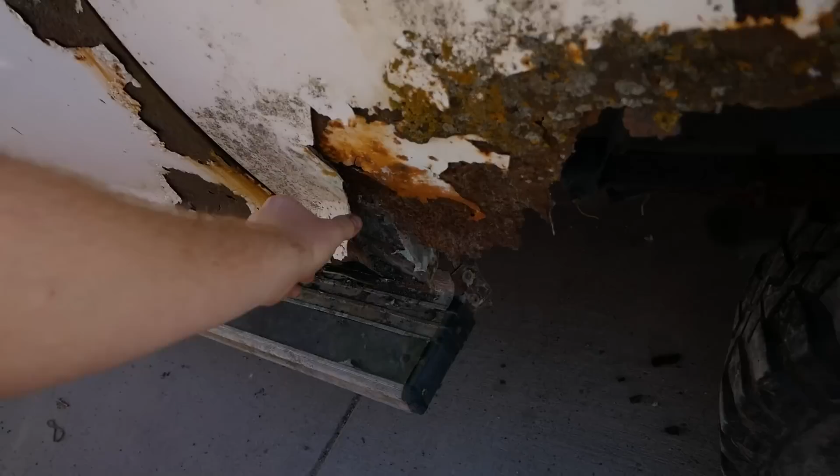So like I mentioned, there's a few things I have to get done right off the bat, and everything beyond there is kind of like, I'll get to it. Number one, safety. I don't want to die in a rusty piece of shit Bronco. If you didn't see episode 1, this thing is absolutely a piece of crap. It's had like 3 layers of repair already on top of it, and it's rusted out since then. That side was replaced. If you come here to the frame, you can just grab the cab mounts, and that's what's left of the frame. Pretty typical Iowa rust mobile.

So yeah, not exactly the essence of safety here. So what we're gonna do is build a roll cage right above here to both keep the frame in one piece and keep me from dying if I roll over. This means I have to do some fabrication, which is honestly my weakest strength when it comes to working on cars, fabricating and welding and all that stuff. I usually just weld a stick to a nut and it's like, yeah, there, it works. So we're gonna do everything right this time, and in order to do that, you have to have the right equipment.

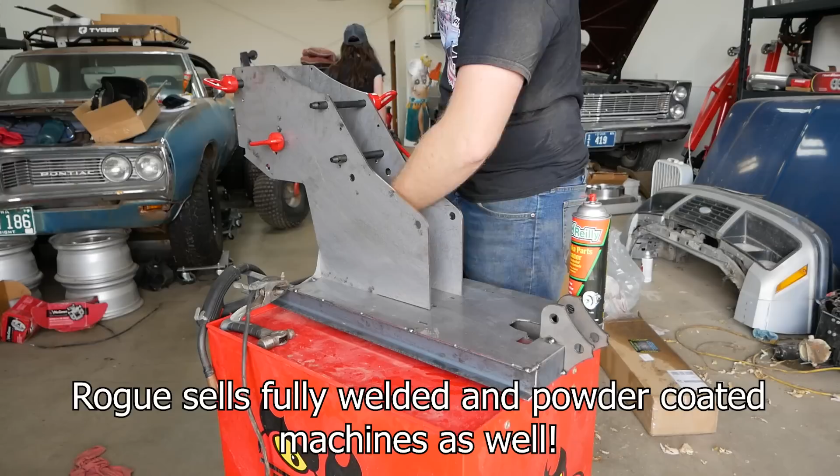Never been a great welder.

Oh wow, yeah, those are pretty bad. Don't zoom in on them. I'm gonna zoom in on them. No one needs to see this. No.

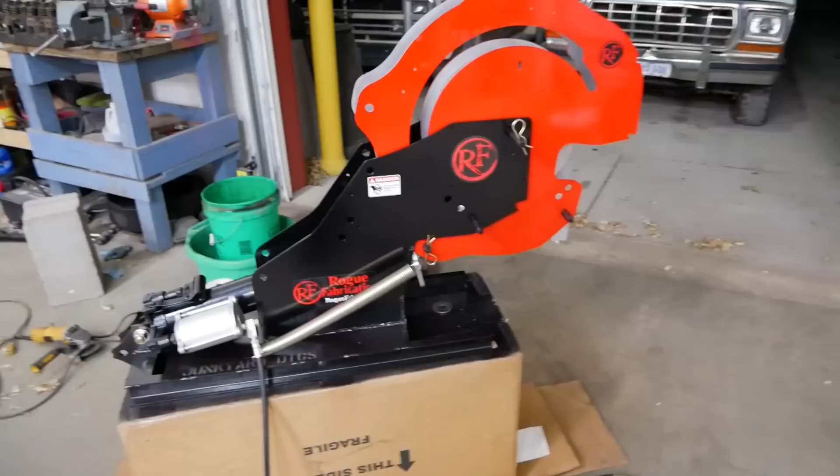Well, it's totally dark now, but our Rogue Fabrication tube bender is finally done. Not to toot my own horn, but I think that looks pretty damn sick with the red, silver on the inside, and black for the frame. And I finally got to use those stencils I made in the Army. There were a couple Junkyard Digs hidden in there.

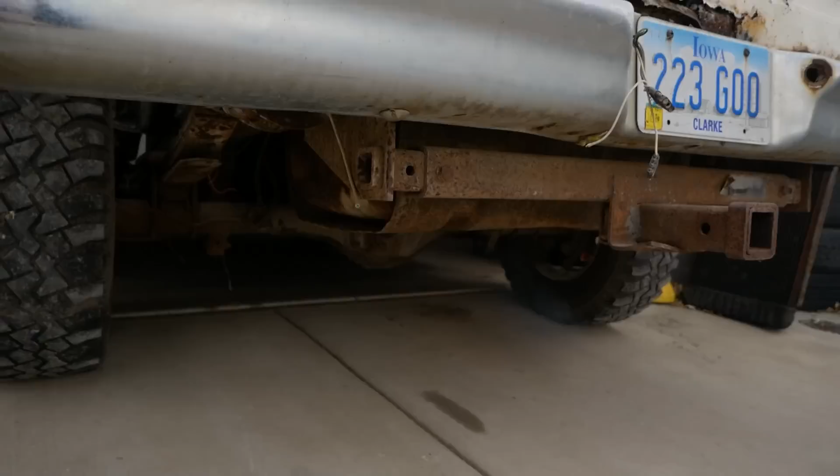The fact this thing runs and drives is honestly very impressive. Remember, this thing is such a piece of shit that it's literally scrap. So we're doing it more justice than it will ever get by giving it one last little ripperoonie on the internet.

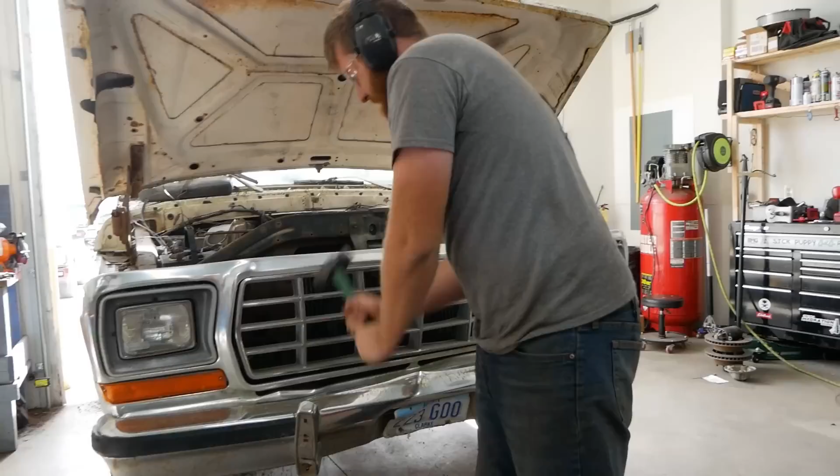Start working our way back. Sway bar, running boards. Cut some of that extra floor shit out. We don't need that. We don't have a floor to cut out. That's true. Cut it out with compressed air. Not like the cutting tool, just the blowgun.

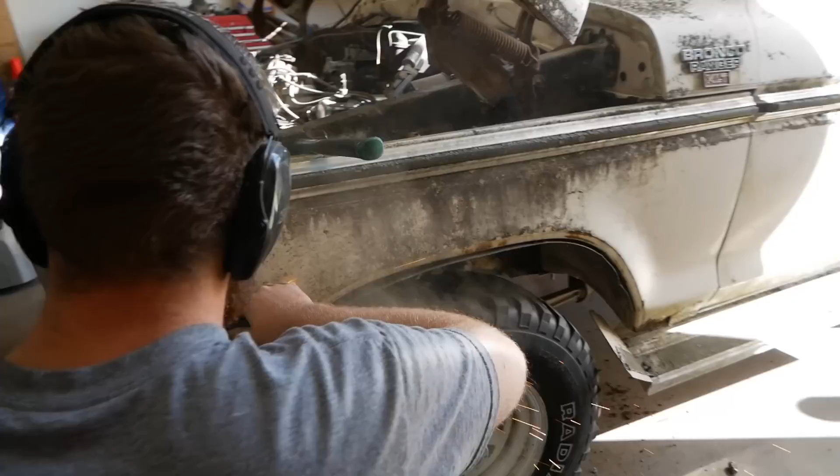Love it. Now this is for style. We're not just Neanderthals.

Looks amazing. Hell yeah, it does.

Forgot a spot. That's attached to the thing that holds the grill on. Nothing a zip tie can't fix.

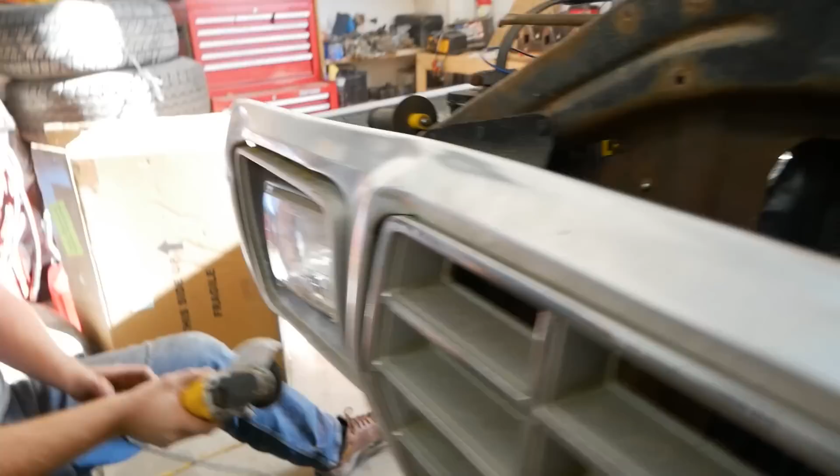How does it look? Like a trophy truck. It really does, actually. Our approach angle is ridiculously good now. We're just going to keep at this for a bit until the other side looks the same, and then we'll be back.

It looks like a Torino. It kind of does, I'm getting Torino vibes, not gonna lie. It looks a lot cooler than I was anticipating. I was a little nervous, but now I'm glad we went this route. This will allow us to open up the inner fender wells, get a lot more air to that engine, so when we're idling off-road for 7 hours, we don't cook the thing.

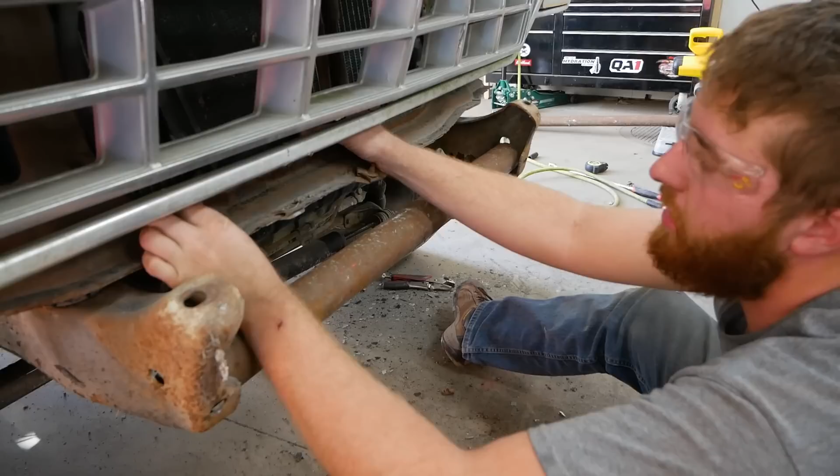Transmission cooler. Okay, listen, we gotta talk. You need to go over here, man. Stay.

That should be more than enough for a tow point. Alright, steering stabilizer's in the way. Someone already welded this bracket up here. I'll see if I can get him off.

It's already blown, there's oil everywhere. It's junk, we don't need it. Way it goes, death wheel. Alright, that sucker's out of there.

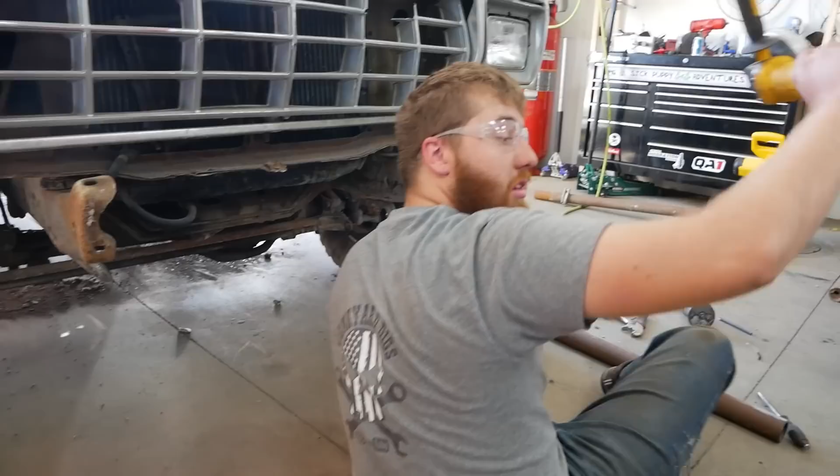Okay, next up is our sway bar. We're going to get that guy out of there so we get some good side-to-side articulation. This looks to be a really beefy sway bar, and I actually kind of want to keep him around, so I'm going to put the death wheel aside. Don't worry, I'll be back. Then we're going to take the bolts off and remove it properly.

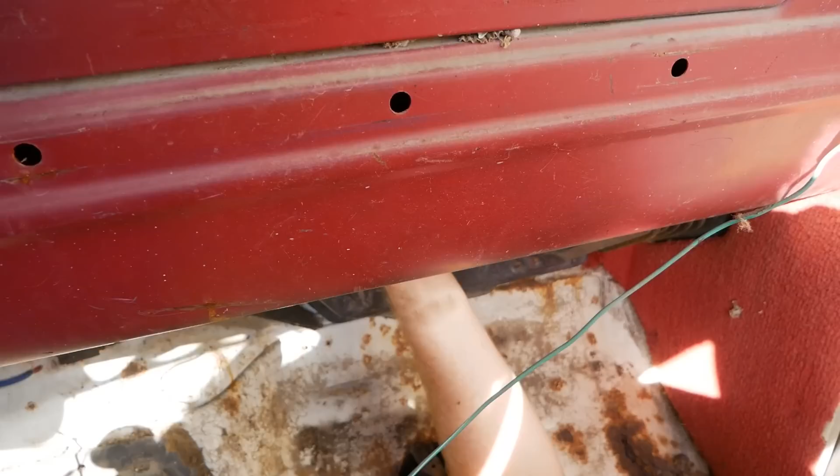Sway bar is off. Wow, one really big convenience of having a super rusty floor - if I wanted to, I could do all the other dash wiring from right here. It'd be no problem. Let's just work on the heater box. Oh yeah, there's some wires. Some more wires. Good to go.

Well, we've got all this stuff taken off now, definitely have a much better approach angle. I say we go give her a test real quick, see if it does any better. We've got, I won't say a course, but there's a pile of dirt over there that we drove up before, and it made it, could have been a little better. We'll see how it does now.

Oh my God. Okay, here we go. Okay, what else you got? Come on, we need a little flex. There it is. We let the body roll now that the stability bar is gone, it's not pulling it around. This hinge is at a different angle.

Oh, it twisted so much. Oh my God. Alright, I'd say we're making progress in the right direction. Let's go get some lunch, come back, and finish up the running boards in the back half. That's good stuff.

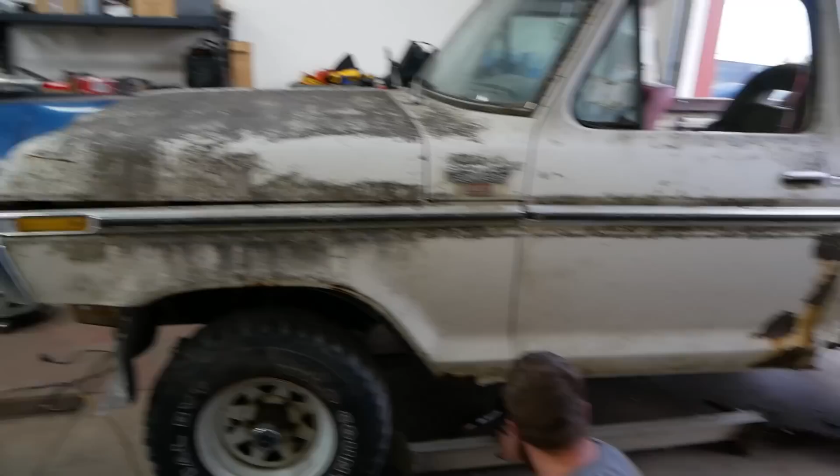There we go, does that look a lot better? That does look a lot better. You're right, Kevin, good job. Okay, same on that side.

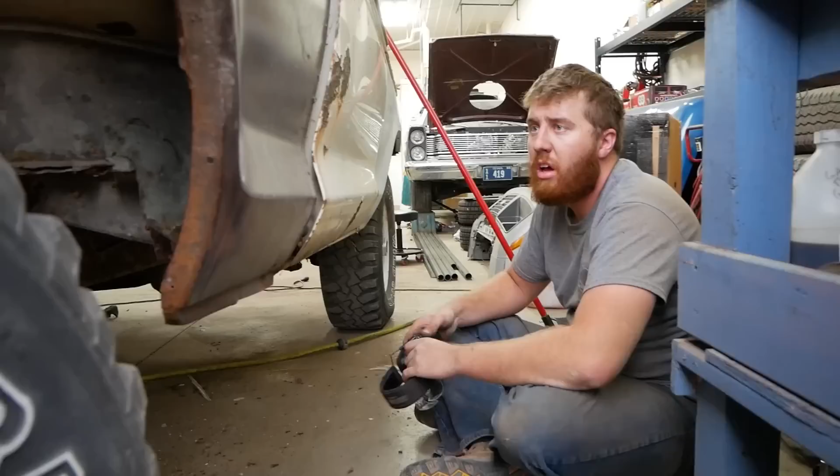Those were the worst thing I've had to take off so far. Okay, everything's done up front and on the sides. Let's move on to the ass end.

There we go, bumper's still good, so we're actually going to save this guy. It snowed last night, it's a solid 34 degrees outside. Winter's here, my favorite.

Seeing that it's going to be like 46 degrees the day of the event, I might want to put these doors back on when we get a little closer to it, but for now, I'm definitely taking them off so that we can get a little more room in here to work.

Oh shit, I forgot about the wiring. Why are there even wires? Is there a speaker? Oh, Jesse! Hello! Can you grab a wire cutter?

Oh, convenient timing for you to arrive for the day. Yep. Oh, thank you, sir. You saved me. You're welcome. Yes, it's possible to take this off with one person if you're smarter than me and you remember the wires. Would you like a door? I'm good, I have some actually.

Dang hole. Alright, so it's time to do the roll cage. We've gone ahead and stared at the frame and some other bits for 40 minutes, so by now the required time of thinking about stuff should be up, and it should come to me as we go.

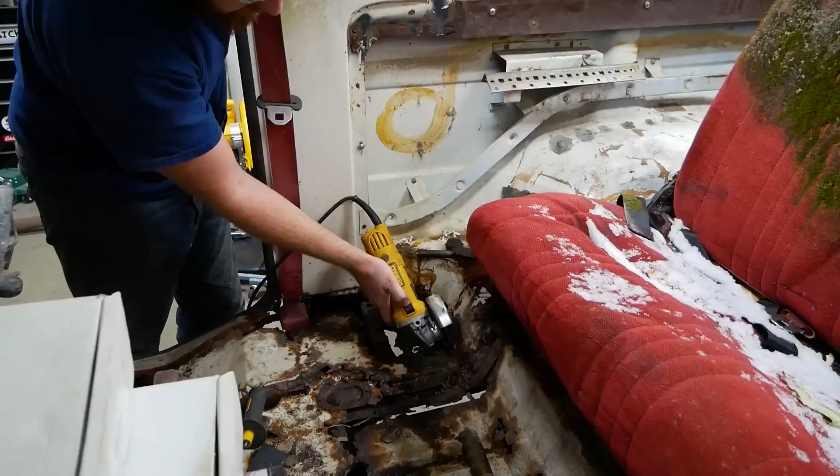Tired of getting dirt in my mouth, so I actually wore a mask. That's all tacked up. I'm going to finish this off, and then we'll be back to see the end result of our bracketry for one side. It only took an hour.

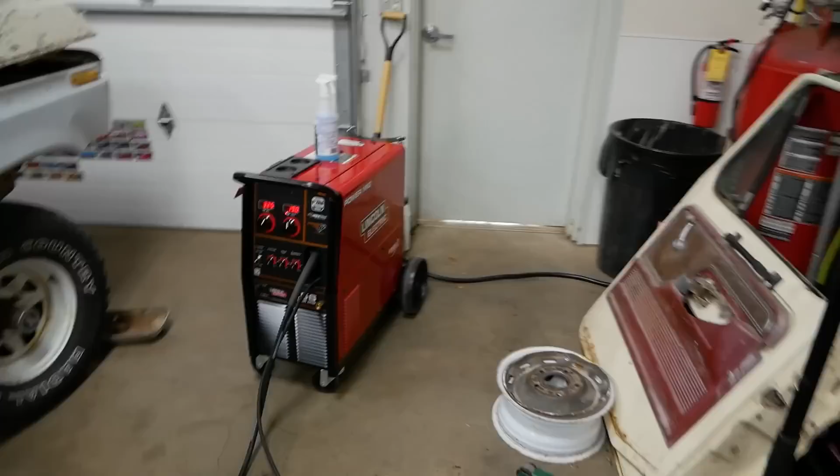I have spent my entire life with worn out, used, poop welders. I've never been able to make a good weld until now because of that right there. That is a brand new Lincoln Electric 256 MIG welder. I was tired of losing time screwing around with all this other stuff and making booger poop welds, so I went down to the welding shop and bought myself a brand new $3,000 welder out of my own pocket.

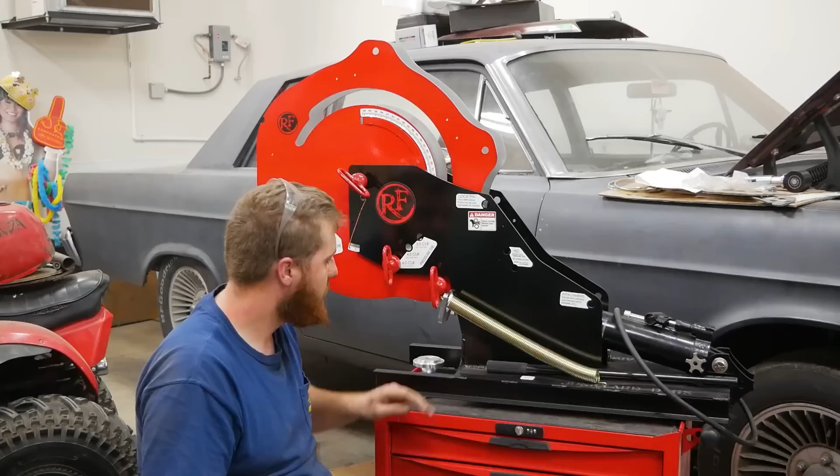That's more like it. So it's come to the point in the video where we're gonna wipe all the dust off of our brand new, freshly painted and assembled Rogue tube bender and figure out how the hell to use this thing. Now usually, when it comes to fabrication channels showcasing one of these, they know what they're doing and they're using big words and talking like blah blah blah, numbers, letters, numbers, and I'm like, what's happening? That looks cool, you can do some cool stuff with it, but I don't know what you're saying that tells me this product has an advantage over other products.

So we're gonna do something no one does. We're all gonna learn how to use this thing together, because I have no idea. There's some numbers and a stick and some offset things and some CLRs and a bunch of holes and pins, and I'm gonna hurt myself on this, all right?

First thing I'm gonna do is spend about a half hour on Google. I'm gonna go through the entire instruction manual, go through all the videos on Rogue's website, look up the fabrication series. That guy's got a lot of great stuff about tube bending. Learn a bunch and then come back and I'm gonna show you what I learned and see if I can figure out what all this stuff means, and we'll all go through this as a team.

Yay, friendship. You don't have friends.

Okay, that's a shape. We've drawn a shape. We've made progress. We watched some videos. We went through some of Rogue's videos. Honestly, Joe, if you're watching this, you're way too smart. Okay, I don't know what the hell you're saying half the time. I watched him like 4 times and he's just like, boopity boopity boop, I built a cage. Where'd the numbers come from? What do I do with my hands? Anyway, we've made this shape.

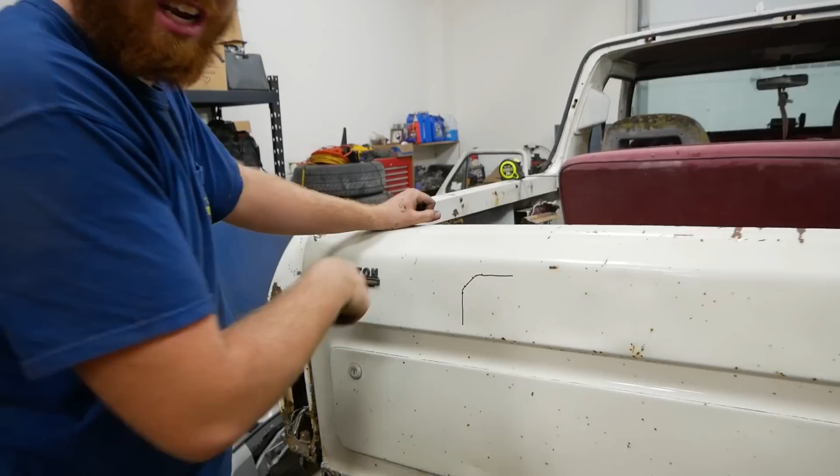These are just arbitrary angles. Don't look at them geometrically. We know from our machine over here, it's got all these nice little stickers and stuff to tell you what everything is. These are our offsets. These 2 pins need to be set in the same holes. And if I spin this guy, you guys can't really see it, but right up here is a sticker that says this is a 6.0 centerline radius CLR die. So I need to run these on 6. There's a 1.75 inch tube on a 6.0 centerline radius.

Numbers. Don't know what it means. It's arbitrary to me at this time. I'll figure it out someday. I know on a 6.0 centerline radius right here, it is 0.104 inches per degree of tube take-up. Like you use that much per degree. And I know over here that we have an offset of 6 inches, because this clamp, which will make more sense when we get into it, is where the tubing clamps, 6 inches away from the center of this die, which is where the bend in this machine starts.

Not all machines use this offset, but the Rogue Fab does, and it's not that hard of math. We only got 10-foot sections of pipe because that's all we can grab, and that's gonna be like 150 inches to do one solid hoop. So we're gonna do two and then probably bridge it. It's probably super wrong and not what you're supposed to do for a roll bar, but this isn't a roll bar I'm intending to use. This is a last-ditch safety roll bar. If I have to use this, it's gonna be a bad time. There's bigger problems I need to worry about if I'm going upside down, like the floor falling off and hitting me in the face.

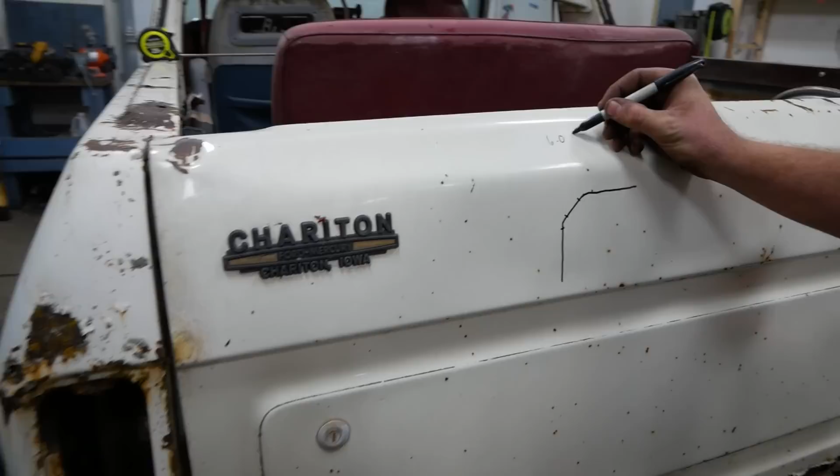So we know we have a 6.0 centerline radius, which equals 0.104 inches per degree, and we have a plus 6 inch offset for the clamp. Yep, come up and turn. 33 inches. There we go.

So now we're going to come up, and we decided we want to do a 30-degree bend and then a 60-degree bend to kind of match what the Bronco's got going on.

Now, time for math. If I'm doing this right, and I'm still actively trying to figure this out right now, 30 degrees times our 0.104 is going to be 3.12 inches. So this guy right here, this bend, this little buddy, is going to be 3.12 inches. That's a potato, not a 2. There we go.

60-degree bend times the same tube take up. This guy's gonna be 6.24. Now we're starting off with the hardest thing possible.

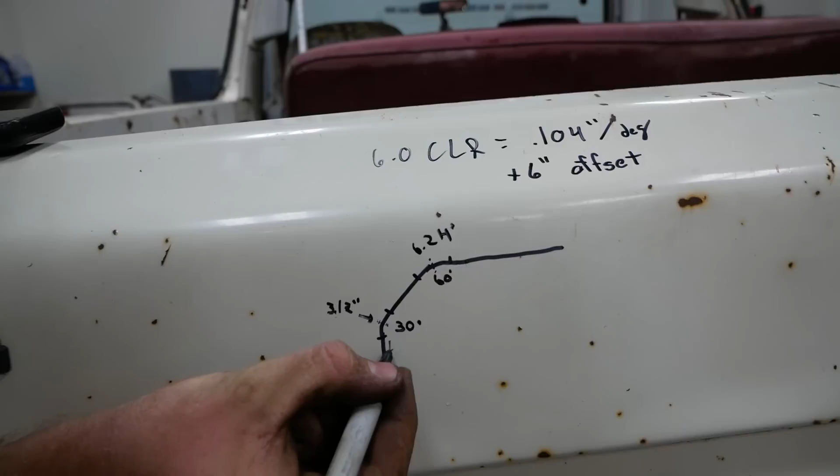We're doing a bend in the middle of a tube and then trying to measure out to another one. So our first bend is simple, it's just 33 inches. We're gonna come backwards for the offset 6 inches to, what is that, 27? And then we're gonna put a line, call that C for the clamp, because 6 inches beyond that, B is going to begin, which is the bend, which is going to exist for 3.12 inches.

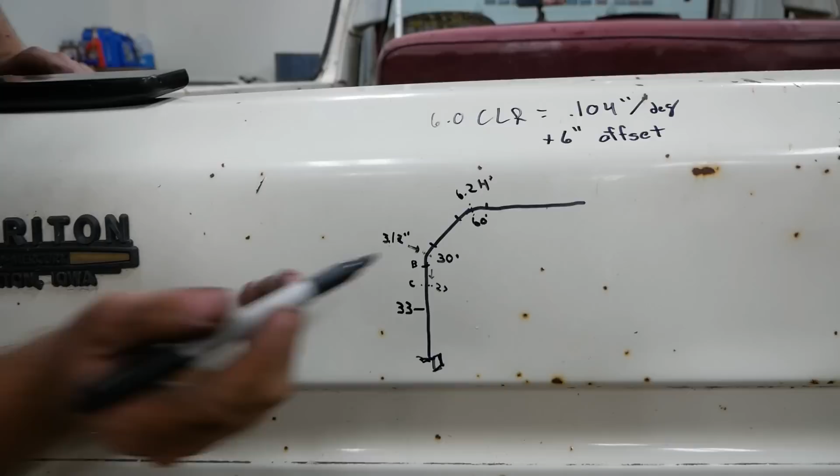Yes. The question is, where the hell do I put the next line? Where's this guy? Where do you exist in this little fiasco right here, buddy? If we take 36 and fold it down to 33, I don't know, is that how that works? No? Oh no, the pipe's still 36 inches long, it's just not 36 inches tall. There we go. I think I know why he needed the total height.

The total height of this, the whole height of this, is 52 inches. So essentially, if we wanted to just make a pipe that came up to here, that was straight, it'd be 52 inches tall. But we want to make a pipe that has a bend right here, which is going to use up 3.12 inches. Would it normally be 3 and now it's 3.12? 30 degrees, 0.1 degree. So then I get shorter? Does it get shorter or longer?

I can't read. Alright, here's what we're going to do. We're going to do it your way. For the first one, to figure out what happens to a piece of pipe when you bend it, we're going to stick that sucker in there at 27 inches. We're going to bend it to a 30, and then we're going to pull it out and look at it, see what goes on. Does it get shorter? Does it get longer? Does it flip upside down? Does it burst into flames? I don't know, okay? But we're going to figure it out. I'm an engineer, I should be able to do this. Maybe like the day I graduate, they go, here's your diploma, and I just go, poof.

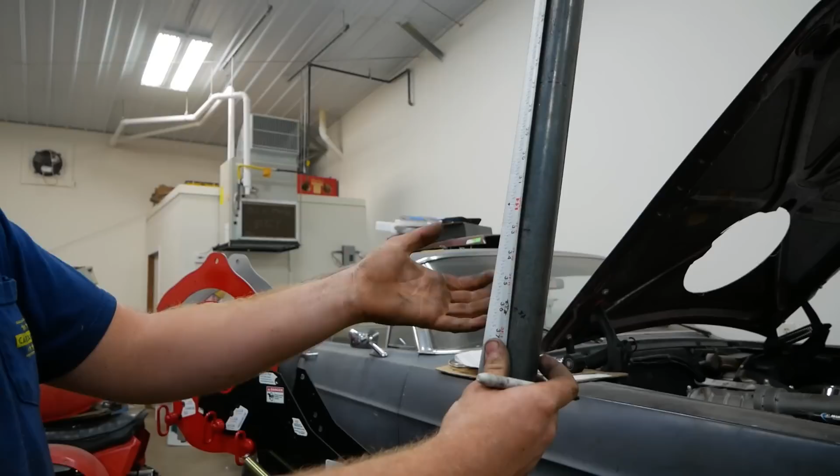Here's why there's a Rogue tube bender sitting in my garage right now. This is why. This is a 7'7" piece of pipe.

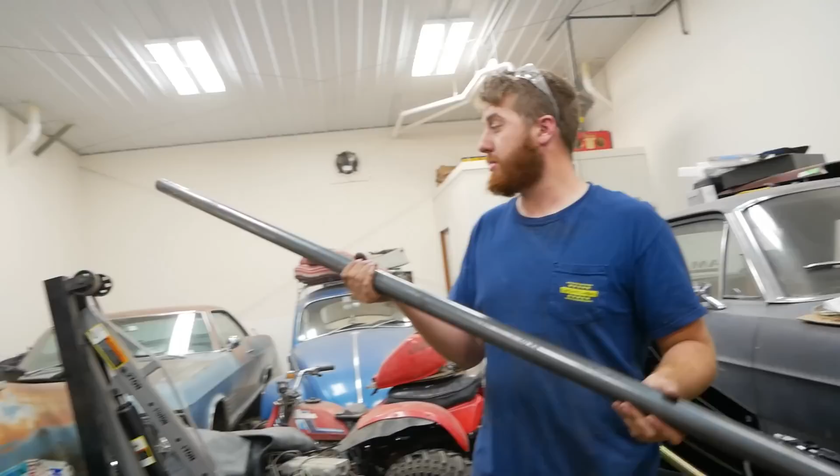It just fits, and the rest of these are 10 that I have to bend. There is no room in this damn garage. If I had to put this thing in a tube bender right here and swing it this way, or that way, or whatever direction, left or right, I've got to have like 14 feet around me to do it. But yeah, we're just gonna do it right here, between all these cars, next to a bunch of engines and four-wheelers and junk I don't have time to clean up.

And that's possible because when this bends, it bends that way. Everything stays right here. It's awesome.

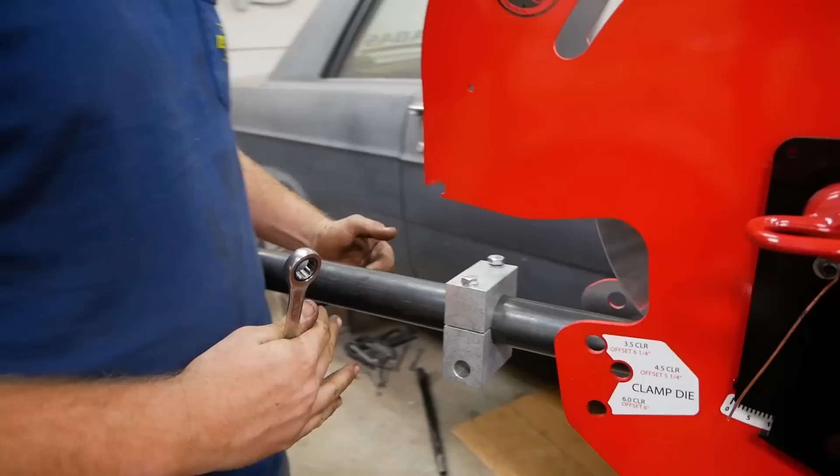Alright, so we have our C1 mark on the forward side of our clamp block where I can see that line. I understand that one. I'm picking up what they're putting down there.

What? Old mate Heaty. They got Old Mate Heaty. It's about time to turn on Old Mate Heaty. It's getting to Old Mate Winter.

Okay, everything looks to be in the right spot. That was a very nervous sounding. I am quite nervous. So it shouldn't blow up that bad.

We're gonna make sure we're zeroed. We're gonna bend, what are we bending? 30 degrees. Now there's this thing called spring back. Whatever that pipe relaxes back to, the difference in that number, it's gonna be like probably 27 if I had to guess. I need to go 30 minus 27, 3, beyond 30. Because steel is springy and it wants to retain this nice straight tubular shape, and we're gonna make it do a dink. So we have to overbend it for it to relax back to perfectly 30 degrees. Pretty easy to do on this machine.

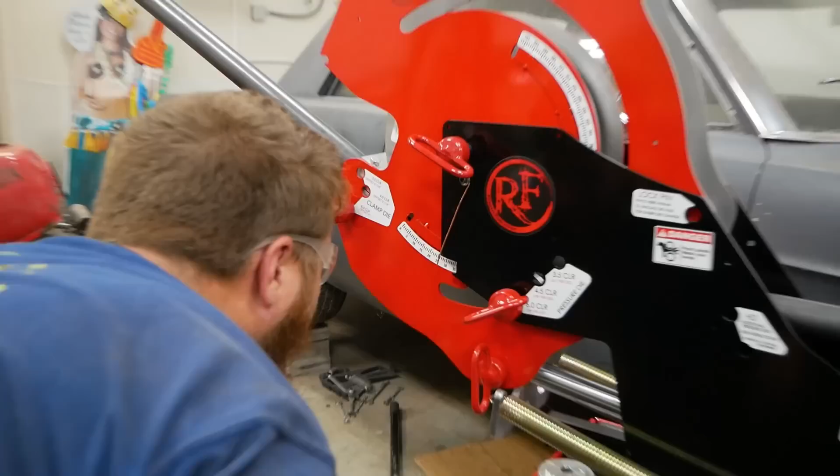Unit's a bit nicer, it's really fast. Okay, our pressure die pin is tight. We're reading exactly 30 degrees. I'm going to loosen this guy until I can turn this.

Keep my nuts away from the springs. There we go. So we're loose right now.

We're at about, actually 26. We got about 4 degrees of spring back. So we're gonna bend beyond, retighten this, bend beyond to 34 degrees. Had to do some math there, sorry. Oof, barely made it through that one. Here we go.

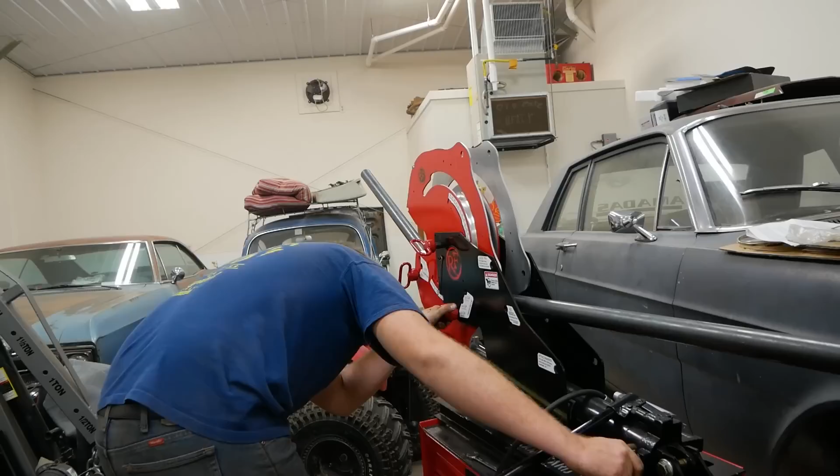Now, when I relax this, 30 degrees. There it is. I press a button, I turn a knob, I have a pipe that's a different shape. That's pretty damn cool. Look at this. I did it right here. Among all this stuff I'm tripping over, I can bend tubing just fine.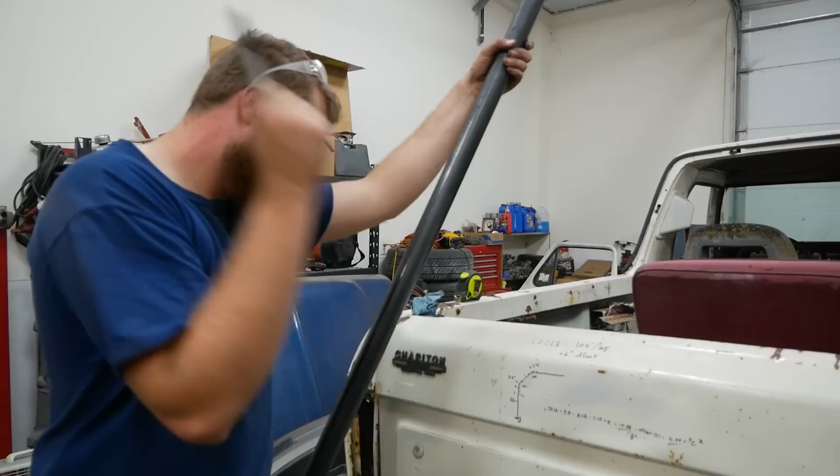From this point to our ceiling height of 52 inches is simply the height that the hoop needs to go plus the bend length. So it's literally just straight line math. It's got to go up 52 inches. We're doing a 30-degree bend at .104 inches per degree. We're just going to add that 3.12 to 52, and that's our pipe length to the end of that ceiling height. Now, where this all comes from, because we know all of these variables besides this guy right here, this is X.

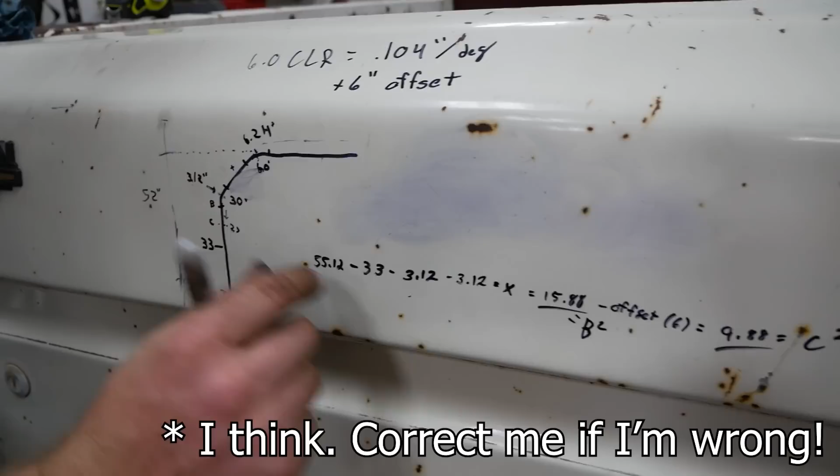We don't know where to put this exact line for the next bend. So we're going to take the length of the pipe to the ceiling, 55.12, minus the length of the initial leg, minus the length of the initial bend, minus half of the 60-degree bend, which is going to leave us just this X bit, which is 15.88 inches. So from here, the end of this bend, to the point in the middle of the next bend is just

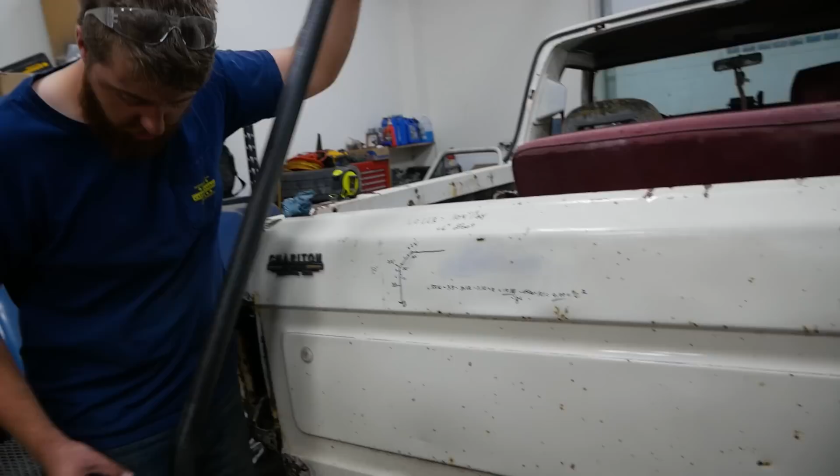Under 16 inches. Now, I need to do a 6-inch offset again for our clamp. So we're going to take another 6 off that. And I have a 9.88 for our second clamp position, which is simply, I eyeball about where this bend stops right here, and then add 9.88 inches, hit it with a Sharpie, throw it back in the bender. Let's do it. I feel smarter.

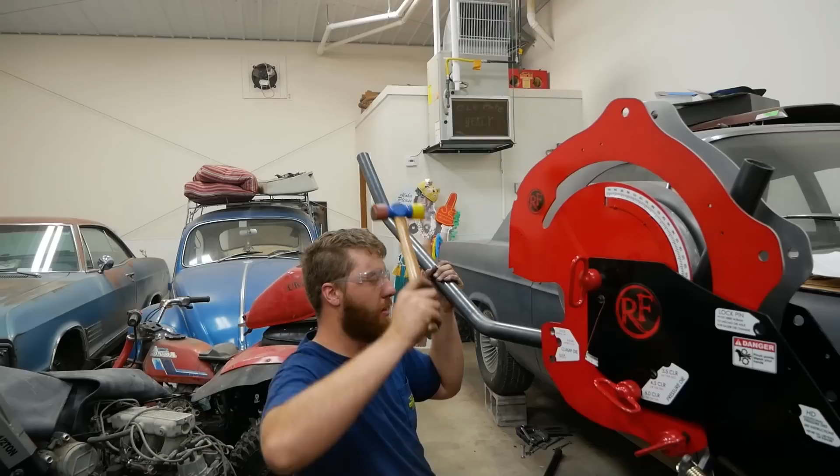And with that, we have the bends for our roll bar. We, as you notice, added another bend. When we put that one in, we didn't like quite where it landed, so we put a 20 degree down here on the bottom.

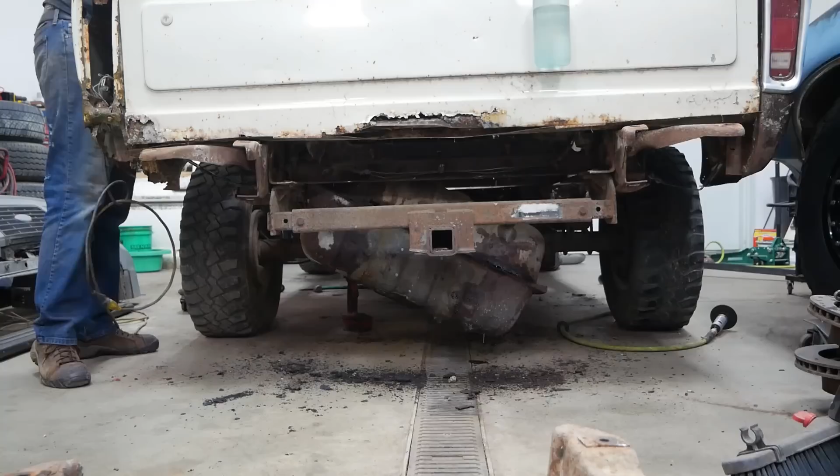It wasn't doing much of the gas tank because there's holes in it.

It's now Tuesday evening. The scene prior to this was Sunday evening. I've been at school for the last 2 days and I finally was able to break away and get down to the shop. From here on I have to make a video for this week and then finish up a couple things for school and I can finally get back to this Bronco. I won't say we're on track to have everything done for Sunday because we're definitely not, but we're on track to have a roll cage in here by Sunday. Maybe.

Okay, so we have our main hoop, but as I showed you earlier, it's pretty floppy. It's actually better now that it's cooled more. But we still need something to come back and brace into what's left of the frame back here. And I say what's left of because I touched the body mount and now we have this hole.

So what I think I'm gonna do, I'm gonna go all the way down to the bottom of the frame, weld, come up, put a plate, weld, weld, weld, then do whatever this angle needs to be to come up and meet up with this guy.

Okay, let's switch everything into engineering mode. We have this shape. Here's our roll bar up front, here's our upper hoop, and here's our down. We will have an angle right here that we'll just use the tube take-up math that's on the Rogue bender to add to the length that this pipe needs to be.

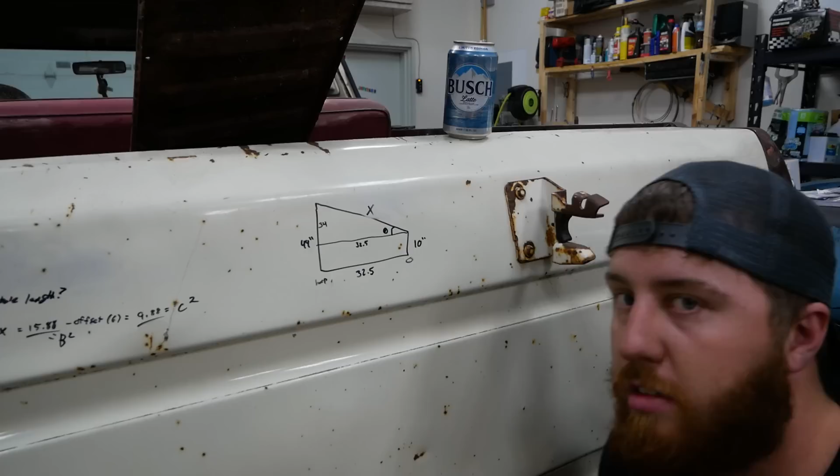So we know a few things here. We know the total height here is 44 inches, we know this rear height's 10 inches, and we know that the distance between the hole we want to put the bar in and the existing bar, we'll call this hoop, is 32.5 inches. Now if you haven't caught on, it's a really good idea to pay attention in school. Trigonometry is something you will use every week of your life, especially in fabrication.

So here's what we don't know. We don't know this angle, and we need to know this angle so that when I bend this bar, it lands on this existing pipe. And we don't know the length of this. I mean, I could just pop the tape measure out and measure it, but there's actually a seat in my way. So this is actually gonna be easier than removing a seat. Trust me. So since our rear comes up 10 inches, we're gonna take 10 inches off our front.

So from this triangle right here is what we can solve for. We got 34 inches on the front, 32.5 along the bottom. We're gonna break out our calculators. Don't get scared, this is easy stuff, okay? All right, opposite adjacent from this angle, opposite adjacent, that's tangent, SOHCAHTOA.

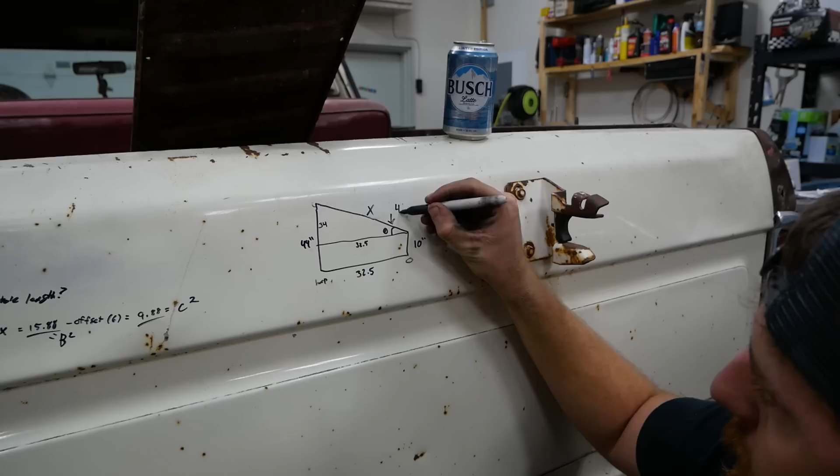All right, we're gonna turn our calculator on. We're gonna throw a tangent inverse in because we're trying to find this angle. We're gonna go 34 divided by 32.5, 46.29. So this angle right here, this guy, theta, is 46 degrees. We're just gonna round. Pretty much what I thought it would be.

Now we have two sides at an angle. Now all we have to do is solve for this side up here. Take a quick swig of your beer and do some math. So this is side A, this is side B, and side C is your hypotenuse.

We know from the Pythagorean theorem that c equals the square root of a squared plus b squared. Simple math, ladies and gentlemen. So we're gonna go 32.5 squared plus 34 squared, and take the square root of that whole thing. That's going to equal side C. Calculator says 47.03 inches. So now we know everything.

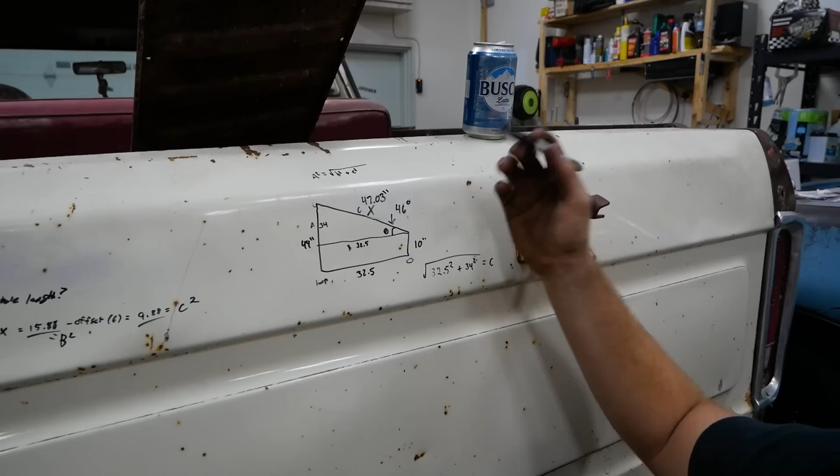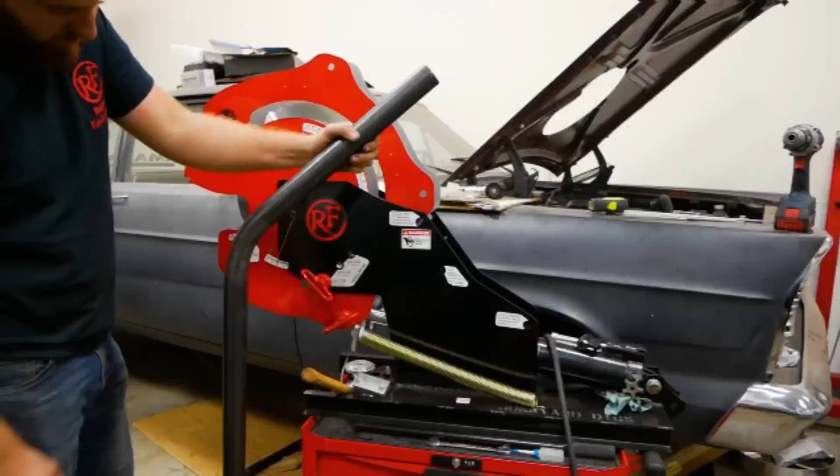Alright, so our tube is bent. We're going to cut it to length, and then we need to notch the end so it'll fit nicely around this other bar. Now this of course requires a notching machine, which is exactly what this is right here.

This is Rogue Fab's notcher. They sent us this as well, along with the bender. You can tell it came pre-welded because it looks a lot better than the welds I do. The thing is, I don't have their cart, and I don't have any raw materials or any kind of cart to mount this to, so I need to put it somewhere, which is exactly what this truck is for.

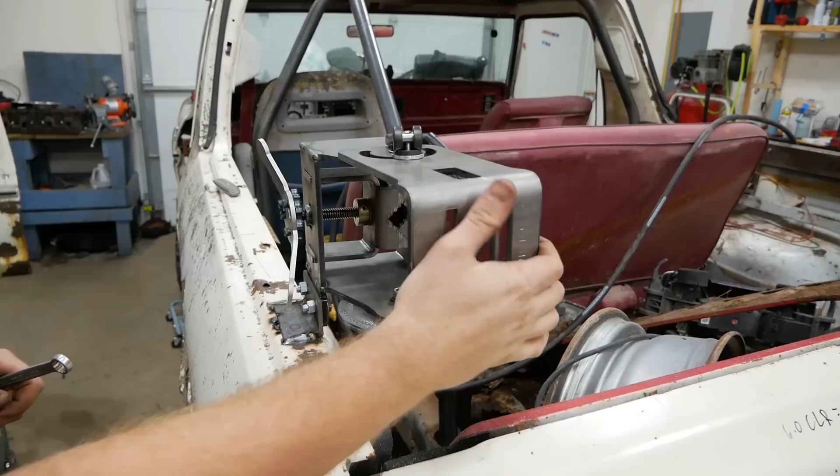Okay, back to the notcher.

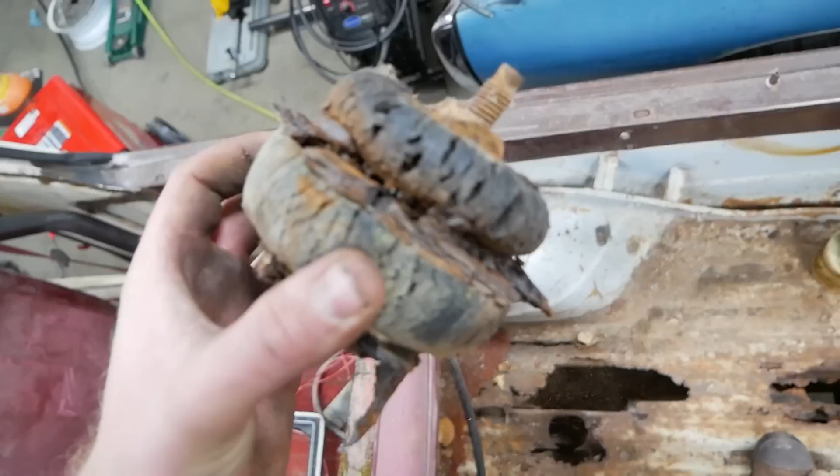Okay, here we go. Yeah, it's actually worse. Look at that. That's supposed to be a frame. It's like twice as thick now because it's delaminated. Rubber's still good though, that's nice.

There you go. Okay, we got tons of room to work. A bit of weight reduction has been given attention to, and I can go ahead and clean that up, prep that for a weld and a plate, and strengthen that hole in the frame because it's kind of at a critical spot.

Okay, it is now Thursday. That leaves us pretty much 2 days until the event. I have today, tomorrow, and Saturday is wrap up the last little bits to make this thing run and drive again. Hopefully today I can finish the cage, start working on getting a fuel system in place, and finish the rims and tires issue that we have.

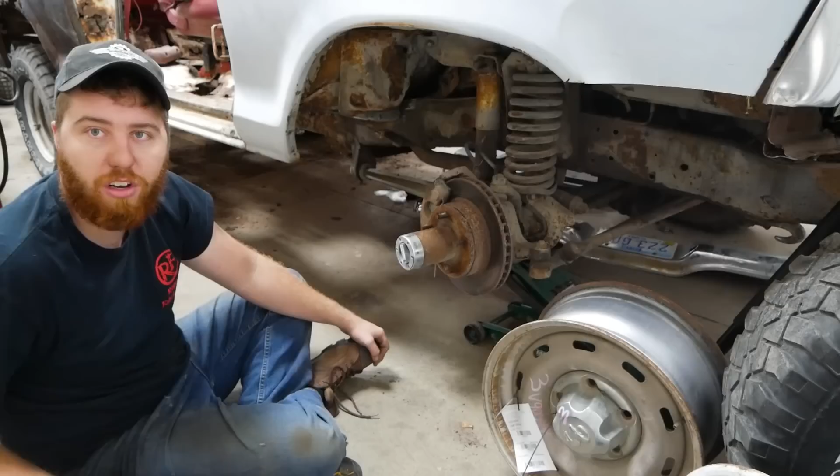Here's what we got. If you're careful enough, you can cut the center out of a rim. The only thing holding this in here is 4 welds. 1, 2, 3, 4. This is a big ring, and then the center plate gets welded in 4 spots. Simple enough. I say simple enough, but it's actually a pain in the ass to get that out.

It took me like an hour to get this out. And then you can take a 14-inch rim and weld this right there.

Which is exactly what we're gonna do, because we're only gonna go 8 miles an hour off-road and nothing matters, which is why I'm starting to love this off-road stuff. Nothing matters. You could have bad U-joints, it could be on fire, your tires could be 8 inches taller on one side and flop up and down. It doesn't matter, because you do 5 miles an hour crawling around all day at idle. Speed and vibration

Doesn't exist. Ron has square drive shafts made of square tubing. They go, and it's fine because you do 3.

So in the spirit of off-road, I'm gonna weld this shit all sorts of random to other stuff, and then torch out the other side, have some 14s mounted on here, and bolt this sucker on. It's gonna be the Scrub Steer-O-Matic 3000. But we're gonna have rims and tires to go off-road for like 200 bucks. Saying that out loud, I realize how much that actually cost me.

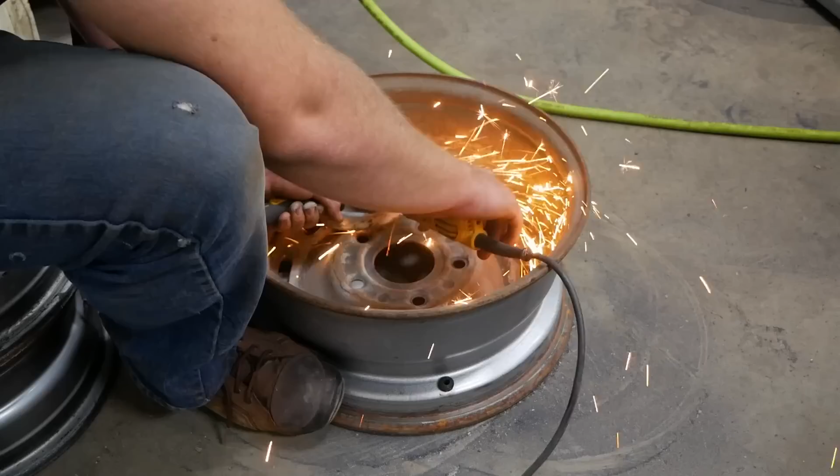Man, what I would give for a plasma cutter.

Alright, changing up our methods a bit. Cut through the top instead of the sides. I wonder if that right there would work. Let's try that. That might be amazing right there.

Okay, so I found something that worked. I cut out the front of this rim. All of this right here is gone. And I've taken this piece, minus all this around the edge, just cut between these holes, and placed it right here in this rim. This gives me a good set into the wheel well, and it stays about that far off of the caliper, which isn't a lot, but it should be enough.

So yeah, that's what we got. It works though. Let's see if it fits on the truck. It does. And it turns. It doesn't look that terribly uncentered. I think I did pretty okay.

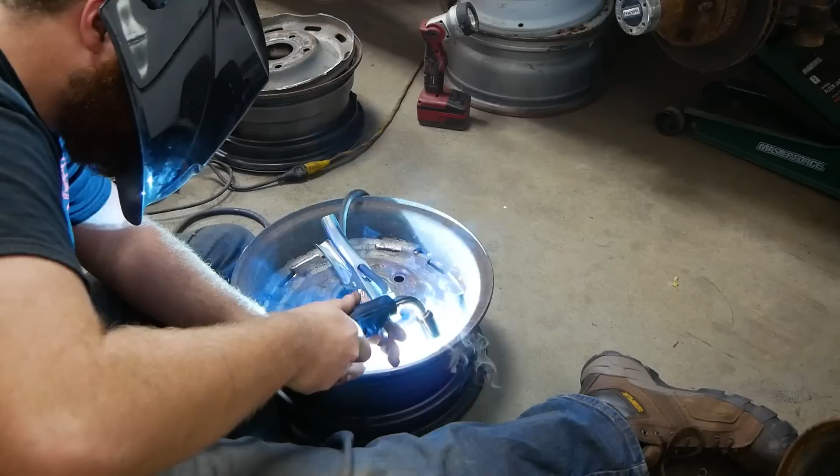I'm gonna go get a fan set up, get a little more circulation through here. I got the door open now. And then repeat this whole process for about 3-4 hours until we have 4 rims that are done, and go have some tires mounted. We'll be back.

Hey Mook, what you got? These were sitting on the porch when I got home. What? That's an Eastwood box. Well, heck, this is a surprise I was not anticipating.

Prior to starting this project, I had been talking to Eastwood because I like their company and I like what they make. Their MiG 135 welder that I had been using up to this point has been great, but this project was just too much thick metal for it to handle, so we had to upgrade. Like I mentioned, I had been talking to Eastwood previously to try to get some tools in the shop, but I didn't think anything was going to get here in time. So I went out and bought a brand new $2,800 welder.

And sure enough, the next day, 6 boxes were sitting on my doorstep. Eastwood surprised the hell out of me and sent us a bunch of stuff, starting with their MP250i multi-process welder. That's actually the box of accessories. This right here is the VersaCut 60 plasma cutter. They sent us a welding cart, a welding helmet, an extension cord, everything we would have needed for this project, now that it's almost done.

Damn you, COVID-19. And of course, to make things even worse, this plasma cutter I've needed all morning showed up 30 minutes after I finished welding the last piece for the rims. But there's still actually one more plate in the rear I need to cut, so we are still gonna put this sucker to use and see how it is.

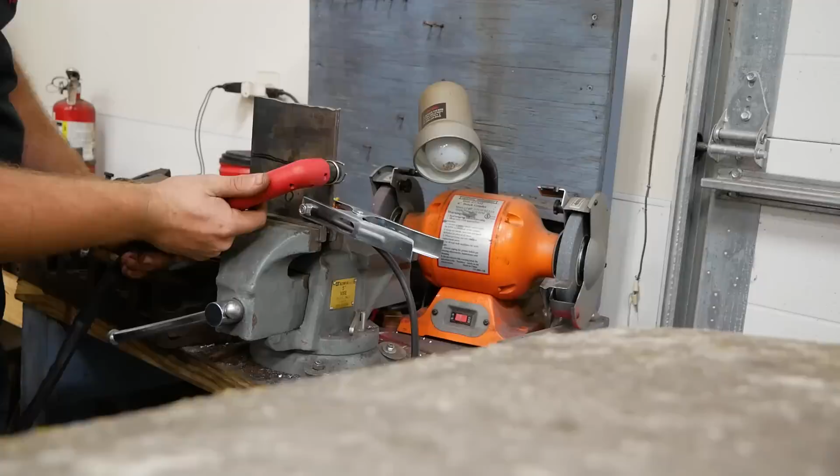How is this legal? This is the best thing I've ever owned. If you run a welding shop and don't have one of these, what are you doing? This would pay for itself in like a week with the amount of time you save.

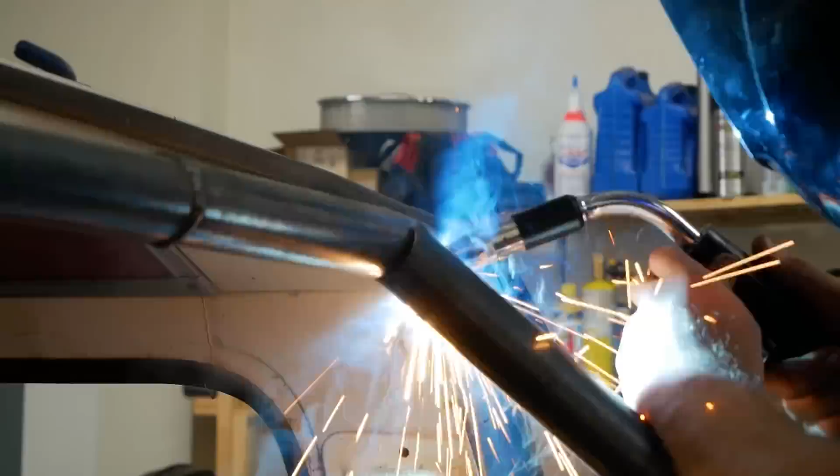Means I'm almost finally done getting showered in sparks because I don't wear long sleeves and gloves. Hey, you know what they say, if you're gonna be stupid, you gotta be tough. My skin is like leather now. That's what leather is made of. Shut up.

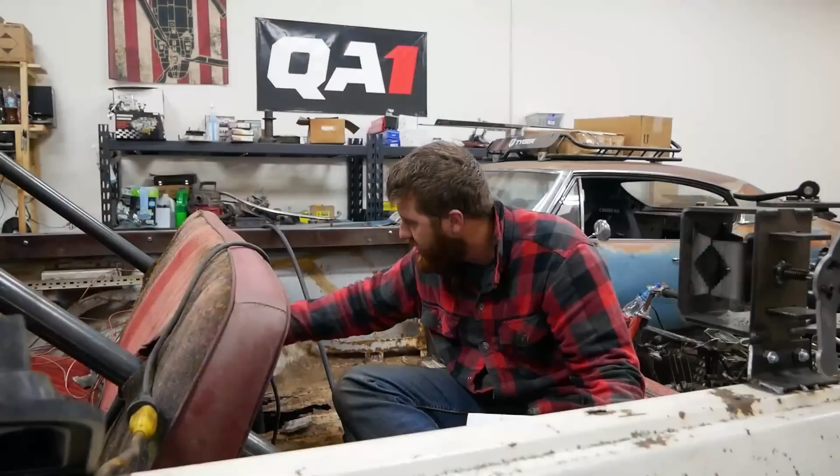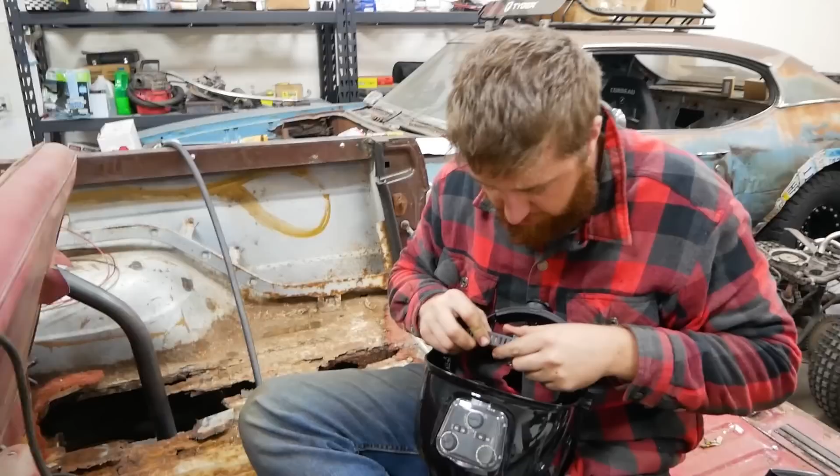Alright, so there's one of our bars. We're coming down to our last big weld when suddenly I remembered, holy crap, I almost forgot. Eastwood sent us this welding helmet, which I'm now looking at for the first time, and holy crap, this thing is awesome. Oh, there's things on the side. It's like a panoramic, oh yeah, panoramic. Whoa. Oh my god, this is so much nicer. I can see. I can actually see. I've been fighting this for 3 days, and now that I'm done welding, it's like everything else on this build.

I opened the box that Eastwood sent, and it's a solution. I can see so well, like literally this to this. There's no difference. Like very, very minimal difference.

Typical welding helmet in full light: pretty dark. Eastwood's panoramic welding helmet.

Very bright. Ooh, I am your garage mate. Clean up your shit. It's all over the place.

So, through that one, the arc color is green and everything's hard to see. This one, it's a bright blue. I can see the area around where I'm welding so much better. Okay, that needs tightened.

It is now Friday afternoon. We have tires. These are some off-road systems from like 2004. They are rock freaking hard. These only have 15 pounds of air in them, and I can totally not even press them down at all. These held air overnight. Our rims worked out pretty well. Let's go ahead and roll them in the shop, button up the last couple things I need to cut and weld, put these on, and test drive the truck again.

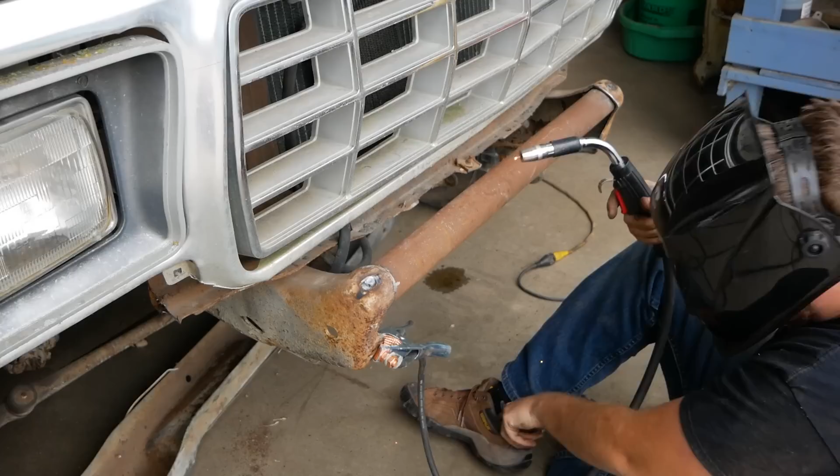Ooh, right down the shoe. That was hot.

We have all four of the big meaty tires on. All of our caging and welding is done for the frame. It is time to go drive over that little unsuspecting, not that bad dirt pile once again. See if it breaks in half.

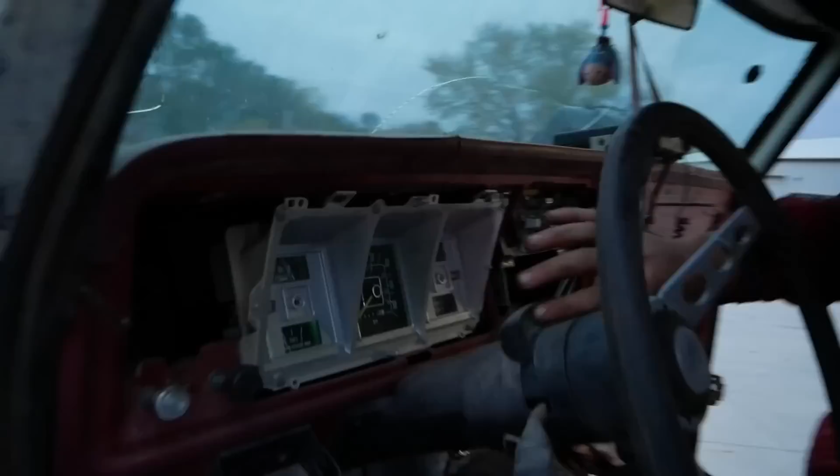Oh, hell yes. This feels right. All the dash lights work perfectly. All of them. This one, all these, everything works. That doesn't even happen in our good cars. What the hell? So you gotta get out of it and look at it from a distance from the side, man. It's amazing. It's amazing. Oh my god, yes! Yes! That thing is awesome! Dude, that thing is kick-ass.

Oh, woohoo, boy! So I'm gonna say it now in case we have issues at the event. The tire with all the crap all over it blew out the sidewall right here, and we put a patch in and then threw an inner tube in here. It's on the back for a reason because there's like no weight back here. But if anything's gonna stop us, it's that tire. All right, to the dirt pile.

There's a lot less creaking and oh, never mind. There is less. No, there's the same amount of noise. A little less. It doesn't flex as bad as the roll bar.

Let's take this sucker back inside and start on the mechanical attributes. We need to figure out a gas tank, see if we're gonna mess with the brake. We only got 2 lugs on one of the tires, and we still have open differentials front and rear. So we have 24 hours to fix everything, pretty much.

Let's get to it. So we found this piece of sheet steel in the scrap pile that just happens to be near the shop. So we're gonna throw this in there. Oh dude, it's like the perfect size. Look at that, right to the top. It gives us somewhere to put our gas tank and keeps that leaf spring from hitting me in the back of the head when it comes off. Let's go back inside, it's really cold out here. Damn.

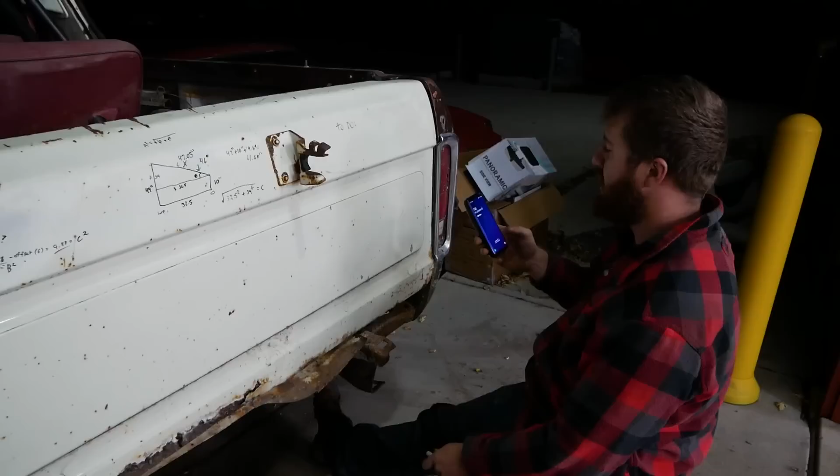It is Friday, October 23rd at 7 p.m. We leave at 7 a.m. Sunday, October 25th, which is 36 hours from right now.

So we thought, let's just sit down and do the old to-do list on the bumper. Fuel tank, okay we're done. No, rear bumper, pool noodle, heater, mix door, mini spool, thermostat, fluids.

There's a bad U-joint up front. But there's always going to be a bad U-joint up front. Five mile an hour, yeah, doesn't matter.

Oh, floors. I mean, all we've done is a roll cage and tires. It literally took me like 5 days. Brakes. Ah yeah, there's that thing. Brakes, dash.

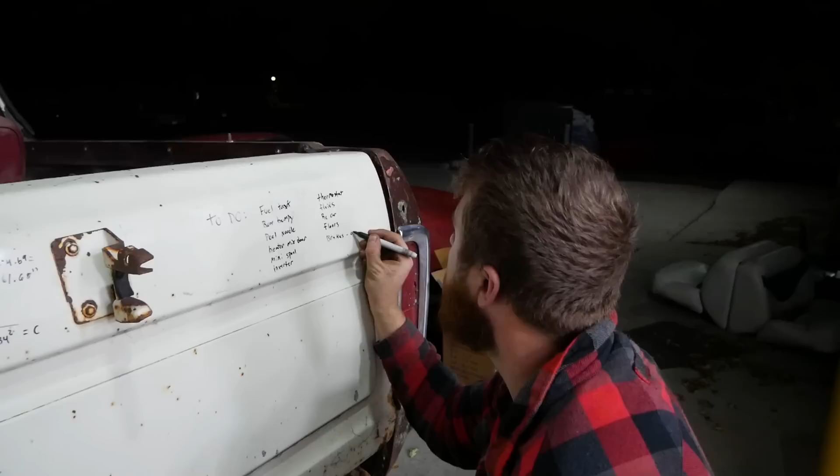Optional, air conditioning, definitely have to get that one done. Never mind this one above it.

I don't think we're going to have time to put an electric fan in it, so we're just going to hope that it's 30 and snowing like it's supposed to be Sunday, and we'll be fine. The truck will be fine, but we're going to die. Yeah, truck's not going to run hot.

We're going to be frozen. Let's go make a run to all the stores before they close, and then start burning some midnight oil. Just kidding, it's actually like 7 o'clock, like I said.

Jesse, no! Oh. I found the tire, it's really knobby.

So as you can see here, we're just changing the oil, slowly waiting for it to drain out. Looks like it's going pretty good. Yep, sweet.

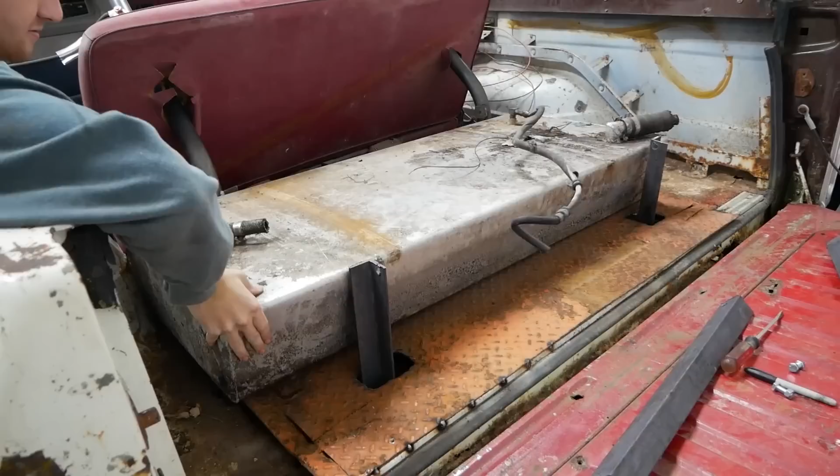That's a fuel tank. Strap her down and plumb it up.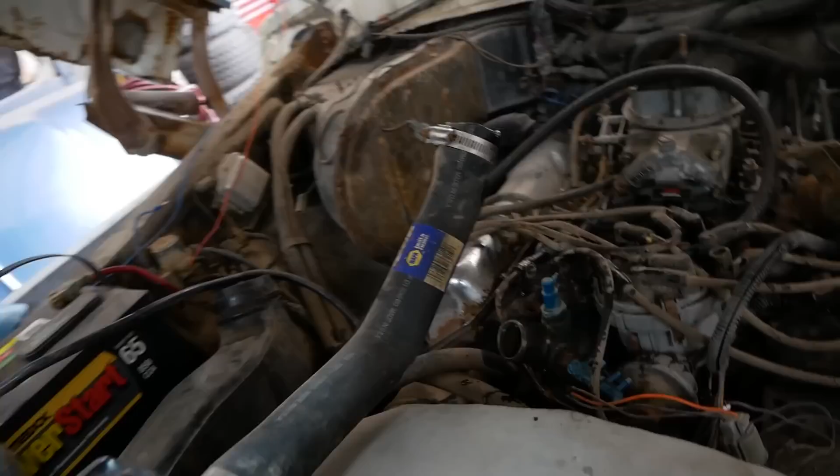So, quick little update. Kevin's off getting parts. We are currently working on replacing this C shock that we've taken out, and while he's gone, I am replacing the thermostat. As you can see right here, someone has used some sort of goo to plug up the radiator. Yes, tasty.

Yes, a thermostat. So today our time is short, but we have a lot of hands here. Jesse's doing the thermostat, we're putting a 160 in to make sure we stay cool while idling around all day. I'm building a tray to set on top of our fuel tank so we have some spot for coolers, gas tank, and parts. Mook's working on some stuff, cleaning up in the cab, getting the last poop out here and there, it's just busy work. We're hauling butt, hoping to get done in time for tomorrow.

Chopping things off the list pretty good. I might be able to get to the mini spool and stuff. We'll see.

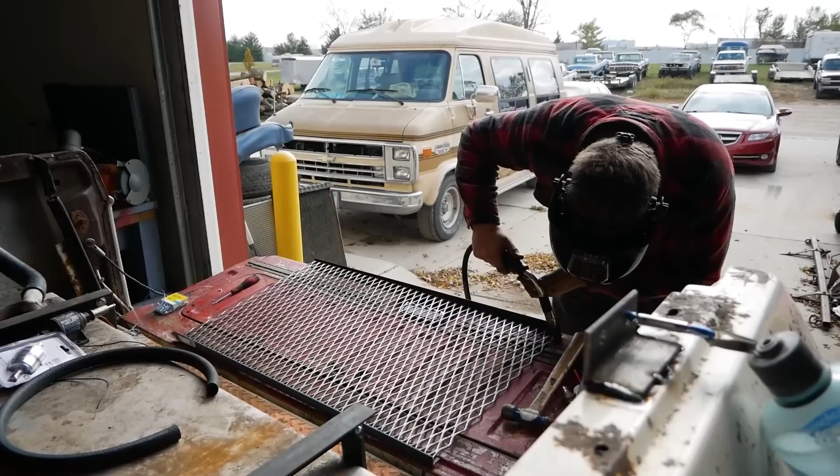Okay, so here's what we got. We have a random piece of radiator hose from O'Reilly's with a hunk of 1 1/4 pipe and then a metal cap, and this is our filling system. We used the existing pickup line and everything from the boat to feed into our pump through our filter, la-di-da.

This here is our tank vent, and I have a ball valve on the end of it. So when we're riding along, we turn our vent on, everything functions just fine. And then we flip upside down and fuel were to start coming out the vent, we go off, no more fuel comes out the vent upside down. Boom, sealed system, can't leak.

I don't see how this could go wrong. I'm sure it will teach me how it can go wrong.

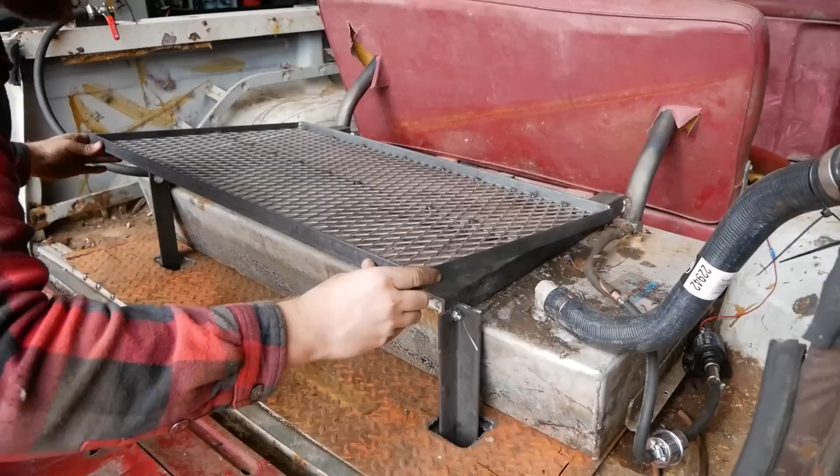To finish things off, we have this rack that I made that will hold our cooler and everything we need back here. Damn, that actually looks pretty good. We're almost to the point where this thing's good to go for the weekend, and then anything beyond that is modifications to help it off-road, such as the mini spool and whatnot. So let's keep chugging away, see if we can get there.

So if you remember on the Revival, we had to replace the solenoid, and we were having weird issues where it would start, but we had to use an accessory wire for somewhere else, and the key would only work for the coil, not the actual crank, and all the electronics would only work when it was running, off the alternator. So I came to test this, fired it up, and we were dropping voltage slowly. I thought about it and decided, if the alternator is working, it will power our lights when the vehicle's running, and only when it's running, which is what we were having. But if the battery's working, it should still start the vehicle, which it was. Everything was working, just not together. I thought about it, and eventually I came to a conclusion.

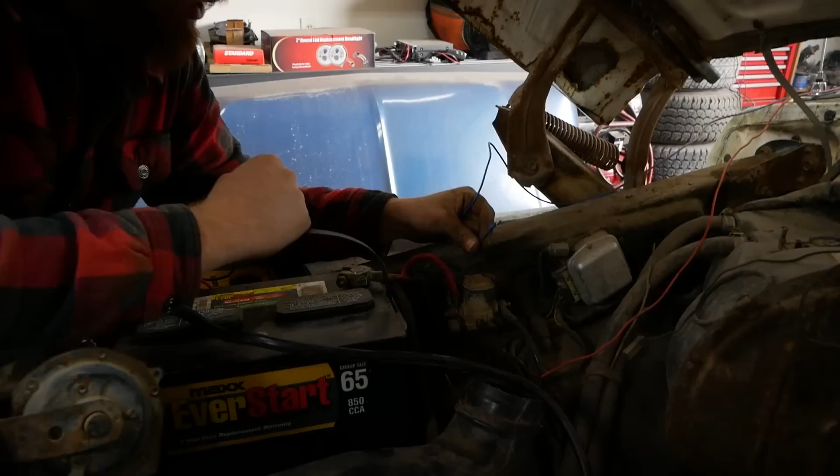This wire right here was my biggest clue. We used this initially for the fuel pump, and then in time it quit working, just stopped, and I was like, what the hell is going on here? So I thought about it, and decided, you know what, all this sat here without a solenoid, just out in the open, not bolted together for 10 years, and probably corroded. So I pulled it apart, and sure enough, all of these wire ends were just rusted to hell. So I took them and filed them down, cleaned them up really nice, and put the bolt back on.

We're gonna see if this works now. I should know right away if that was the issue, if we throw the switch for the fuel pump and it turns on, if I can get this to stay, because it's been cut in half. There we go. Actually, we should be able to know even before that. If I pull the headlight switch and the headlights come on, we're on the right track. Ready? Yeah, one headlight. Okay, fuel pump? We got a fuel pump. Alright, let's see if the key works fully. There it is.

Although they were bolted together really tight, they were so rusty that they weren't connecting to each other. The battery was connecting to the solenoid, and the alternator was connecting to power the system, but the battery and the alternator weren't on speaking terms, and it was a mess.

So now, 14 volts, we have a charging system. It runs better too.

Alright, so everything under here is good to go. We've got a new thermostat, fresh oil, a big spider just crawled out of that. We have a fuel line set up, we have a charging system. Our fan's moving a ton more air since we tightened the belt. It was slipping all along, but we just couldn't hear it because it was old and soft, I imagine. If I have time, I'll replace that accelerator pump diaphragm again, but as far as everything under the hood goes, I think we're good to go.

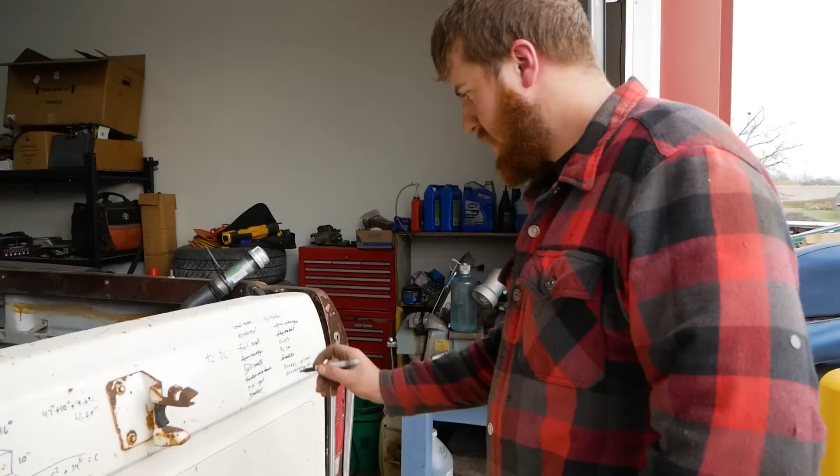So let's go check our to-do list, see what's left. I bet this video is like an hour long by now. Alright, alternator, done. The front left shock has been taken off. We couldn't find one, so we're either going to go no shocks or see if we can get one off the burnt Turd. Let's do a fluids check, fix the shock and the wheel studs, and then we're basically done besides putting a mini spool in. And it's 2 p.m. That's pretty damn good.

If I start tearing into this one, I can do this one at the same time. Went down to O'Reilly's and found a shock that is hoop on the bottom, pin on top, of similar size, and we're gonna put it in. Maybe, we'll see, it's fighting us.

Kind of massage everything into the proper shape, and then we'll be good to go. It's probably 3:30, the day before the event. We're gonna pop all of this stuff off and pull our axle shafts and our center section and put a mini spool in. Yeah, at least that's the goal.

Boop. And boop. Okay. Brakes are off. This tensioner's gone. Doesn't matter, we're going in the woods.

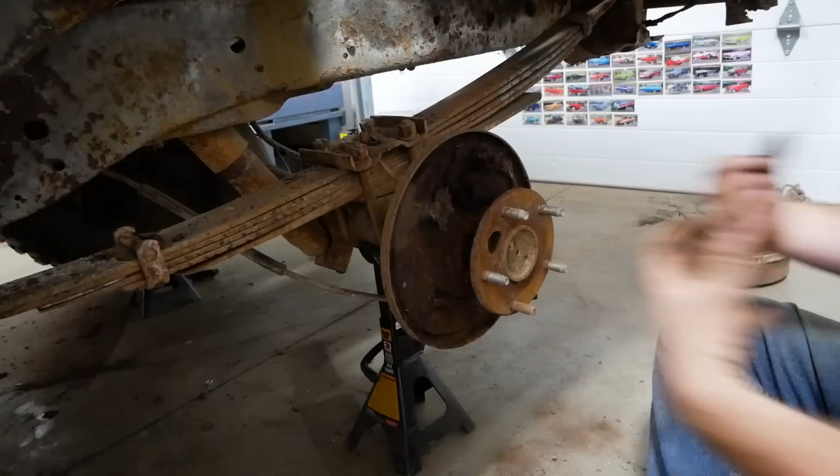Alright, so at this point we'll pop these four off and bring our axle shafts out each end, and then we can pull our center out of the front. Let's do it.

There we go. Oh, look at all the delicious goo I forgot to catch. Perfect, alright.

There's one side. Do the same for the other. Pop the front out, put the spool in.

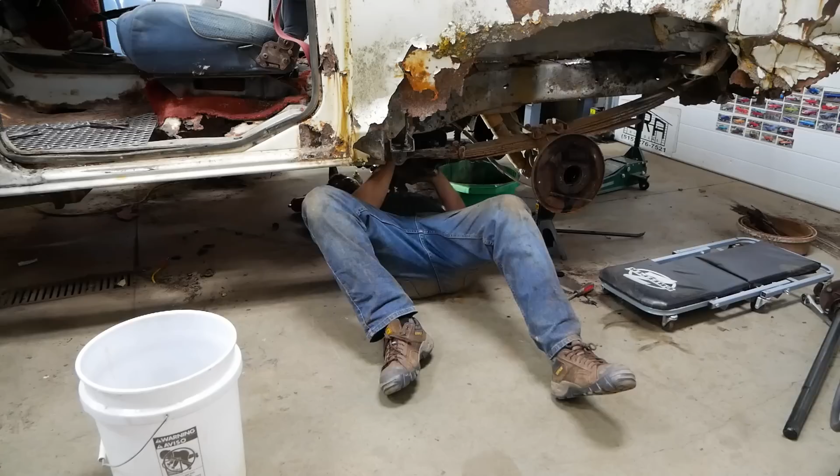So with that, we have an empty axle housing. I'm going to get started on replacing everything for our brakes. Ashton, my buddy from Quick Performance here in town, is going to do his magic on throwing that mini spool in to save us a little time, and then I won't screw it up, because I've never done one. This is not a good scenario to rush through it the first time I'm going to do one.

So it's a good learning experience for you though. Yeah, that's true. So while Ashton is putting the mini spool in that center, I'm going to go ahead and get these brake plates ready so that when he gets back we can slap the axles in, hook up the brakes, do some brake lines, and be done.

We're using the brakes that came off of Mook's truck from her last video. I made sure to save them so that we could do this.

Alright, Ashton just got back from Quick Performance down the road, dropped off my center section, saved me 2 hours of time. Thank you very much, sir.

If you're unaware what a mini spool is, it essentially replaces your spider gears with a solid block of metal. So this is now a solid rear axle. And if I ever wanted to go back to having an open differential, I could. Whereas most people will take this out and just weld it all up, and that's how it is forever, and it's essentially junk if it breaks or fails or you want to put a limited slip or anything in.

I still have a perfectly usable 9-inch housing. Call up Quick Performance, they are $15 for a 31 spline mini spool. $15, you can have a solid rear axle. QuickPerformance.com, call them up, they're located here in Ames if you are local.

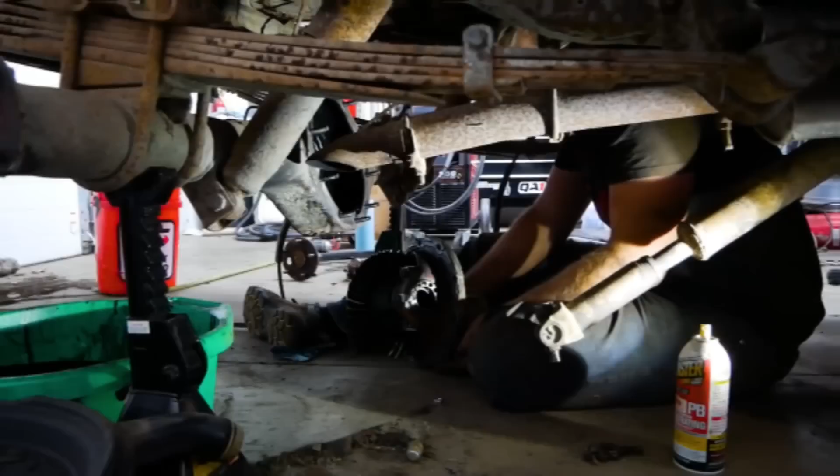Let's go ahead and get this sucker back in the truck, put our axles in, and put all of our brakes on. Okay, center section's all clean, all our RTV is on. Now let's put it in. A mere 75, 80 pounds, that's all.

Oh, rest in peace, RTV. Ow! Shit, rest in peace, my finger.

We'll get these nuts back on, torque everything down, and then put our axles in, put our brakes on, and fill the sucker with goo. Up, up, down, down, up, up, down, down. That's clean right there.

No air, we have rear brakes. Hell yes. Alright, throw the drive shaft back on, fill the differential with fluid, cross everything off the list, go wheeling.

Can I go up now? Oh yeah, up, up. Okay, our brakes are done.

Jesse and Mook are putting the tires on, and everything on the back of the vehicle is finished. I am going to pop this accelerator pump out.

Emphasis on pop. If you remember, this was like the small diaphragm, and this is the big cup. So we're going to change that around so that we have the big diaphragm in the big cup.

And there we go. Tighten this back down, put the carburetor back on, check all the lugs, do one last fluid check on the coolant and oil, and load it on the trailer.

There it is. We're done.

Alright, with that, it is 8 hours until we have to be an hour south of here in Knoxville, Iowa, for the Make It or Break It Toys for Tots event. As far as I'm aware, we're going to have about 5 or 6 rigs similar to this meeting out there, and it's going to be one hell of a fun time.

So we will see you next week right here on Junkyard Digs, where we take this hunk of junk and see just how well it does off-road.